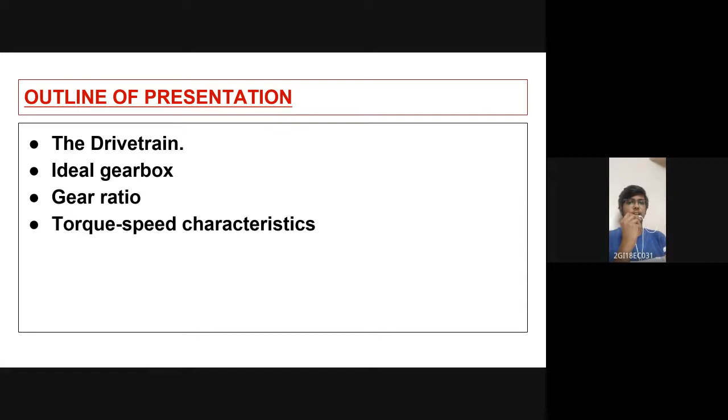Next. To start about the electric vehicle drivetrain, drivetrain is a basic skeleton of an electric vehicle. It consists of a battery, power converter, electric motor, and a transmission. Battery can be of any type. It can be lead acid battery or lithium ion battery or lithium iron phosphate battery, whichever battery the vehicle is compatible with. And the power converter is nothing but a DC to AC converter.

The electric motor runs on AC current, so the power converter is required to convert the DC current from the battery and run the motor. And the transmission is where the gear system is situated. This helps in the movement of the wheels.

And to differentiate between the IC engine and the electric vehicle drivetrain, the IC engine has 60% more components compared to the electric vehicle drivetrain, and the IC engine requires more levels of gears to pick up a higher torque or energy compared to the electric vehicle drivetrain. Next.

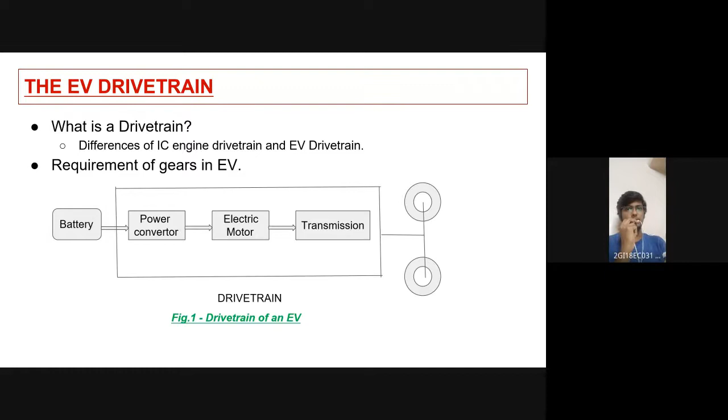Next, to speak about the ideal gearbox, the ideal gear ratio for an electric vehicle is 1 is to 8. It uses the laws of conservation of energy to maintain steady flow of power and energy. As it is written in the first point, efficiency is 100%. This shows that the power and energy at the input point is equal to the power and energy at the output point. There is no loss of energy.

And the second point is the gears are perfectly rigid. This tells us that the gears won't break due to high pressure or any other circumstances. And the third point is no space between the teeth. This shows that there will be no power loss. If there is a space between the teeth, the gears would slip, which might damage the teeth of the gear and hinder the rotating motion of the wheel.

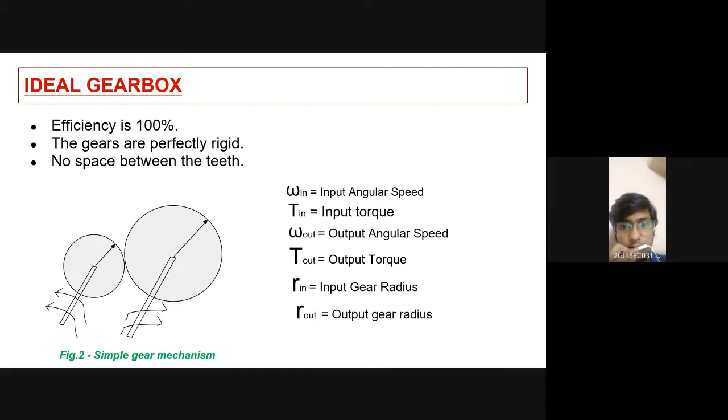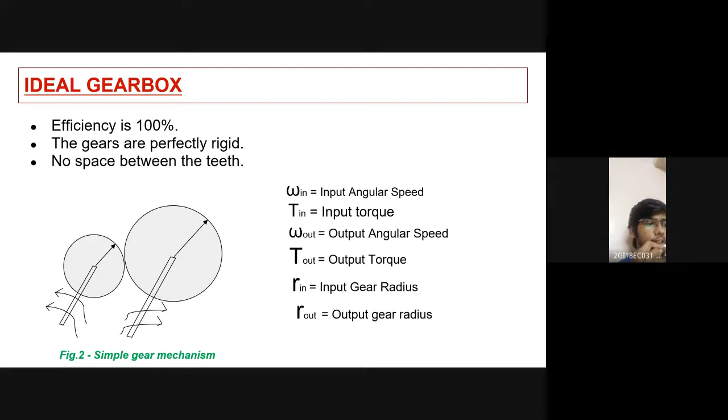So in the diagram, we can see the simple gear mechanism, and on the right side, we can see omega. Omega is the input angular speed, T is the torque, and R is the radius of the input gear. Here, the gear ratio is 1 is to 8, and as we go on increasing the gear ratio, the speed of the vehicle is increased, and as we go on decreasing the gear ratio, the acceleration increases. So this was all about the gear. Siddharth will continue further.

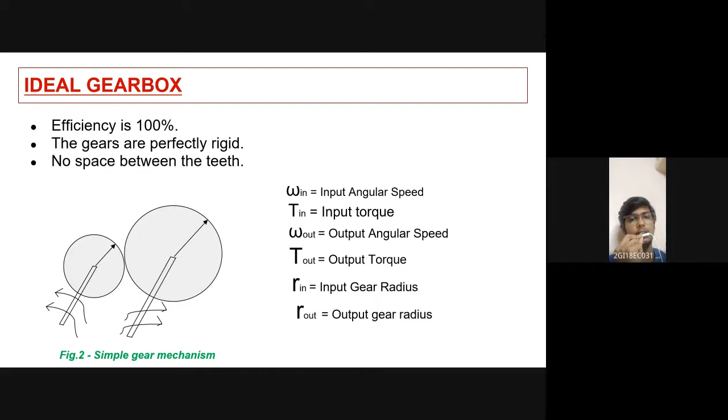Good afternoon, sir. As my friend Gaurish has given a brief about what the EV drivetrain looks like and what its components are, I will talk in detail about the individual components. Let's start with the gear ratio. Gear ratio is one of the most important parameters which helps us determine other important EV parameters such as what grade it will be able to overcome, what is its torque ability, or what is its maximum speed. These all important parameters can be determined by selecting a perfect gear ratio.

What is this gear ratio then? Gear ratio is basically the ratio of speeds between the input shaft and the output shaft. In simple words, if you consider two gear plates as shown in figure 3, the ratio of the radii of both the gear plates will also give you the gear ratio. That is shown in equation number 1, where omega in and omega out are the gear speeds.

Okay, so as my friend Gaurish said before, in the steady state model we are considering the power loss to be zero, that is P in equals P out. Taking that assumption into consideration, equation 2 is derived, which states that the product of torque and speed at the output side will be equal to the product of torque and speed at the input side. Simplifying equation number 2, we can state that gear ratio is also the ratio of torque at the output end to the torque at the input end.

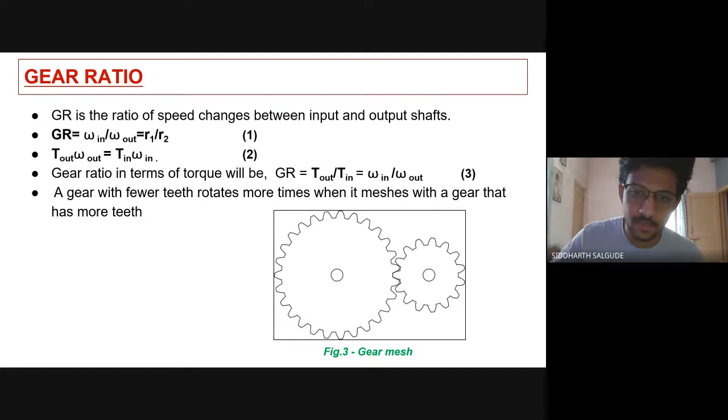Taking figure 3 into consideration, I would like to give a general idea of what gears do. A gear mechanism is just a torque multiplier. Assuming the motor shaft is connected to the bigger wheel in figure 3, it is powered by the motor shaft, so it will rotate. As it has more teeth meshing with a smaller wheel having fewer teeth, one rotation of the bigger wheel will cause multiple rotations of the smaller wheel, which is thus the mechanism of a torque multiplier. This is the functionality that gear ratio provides us with.

The same equation that we derived before, that is, gear ratio is nothing but the ratio of torques, can be derived using an alternative method using Newton's third law of motion. Considering the same gear mesh in figure 3 shown before, at the gear mesh there are two forces acting in opposite directions. As Newton's third law states, every action has an equal and opposite reaction.

We can determine the force equations as the ratio of torque to radius on the output side is equal to the ratio of torque to radius on the input side. Simplifying the equation, we come to the same conclusion, that is, gear ratio is nothing but the ratio of torque at the output side to the torque on the input side.

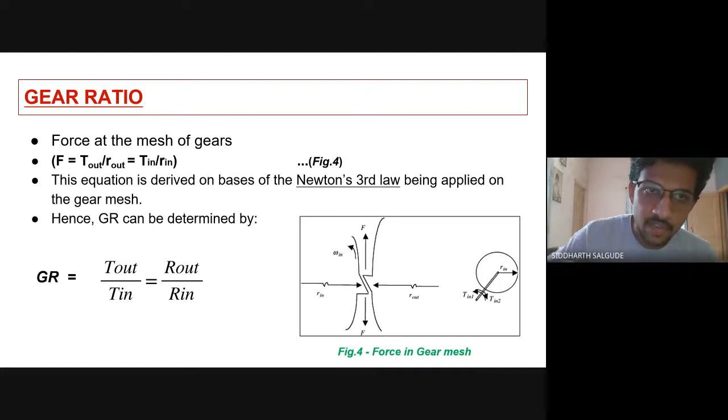Moving ahead, I will talk about the second component, that is the torque speed characteristics. This is nothing but a simple graph in which we will plot speed to torque. But this is very important as it will give you an idea about what gear ratio you should choose to overcome a certain grade to achieve a certain speed. And I would like to tell that torque to speed characteristics are also interrelated with gear ratios. We look at the equations and know.

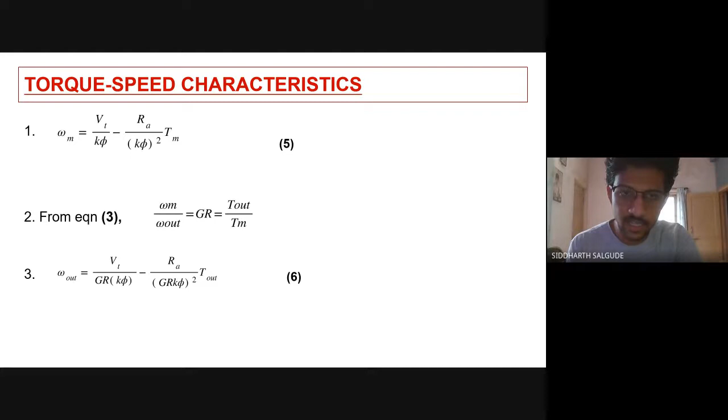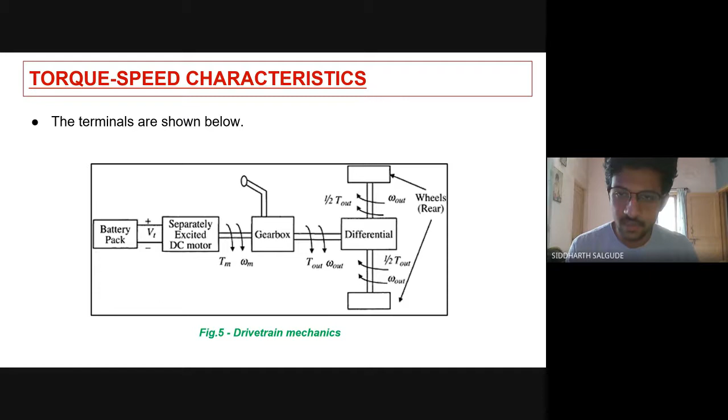So it is basically a trade-off between your torque, speed, and grade. At higher torque, you can overcome more grade, but have a low speed. And vice versa, you can overcome a small grade, but at higher speed with low torque.

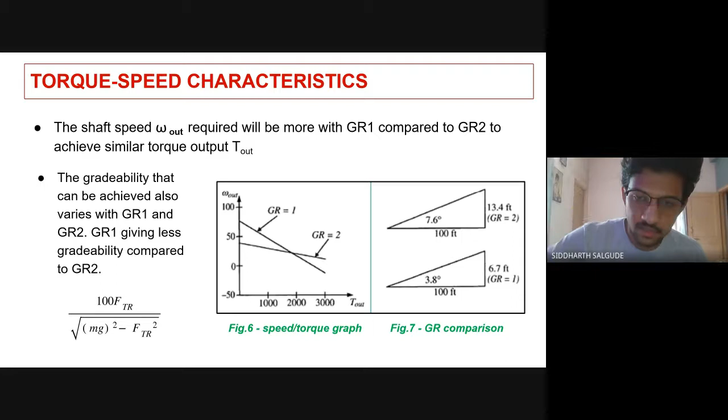Correct. Good presentation. You have gone into the basics and explained them well. Fine. Thank you. That was good. So you can now